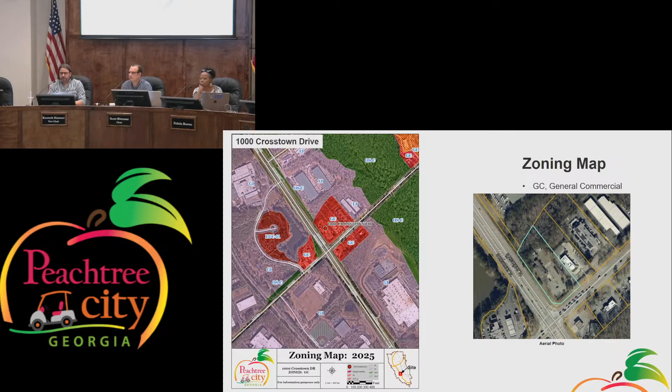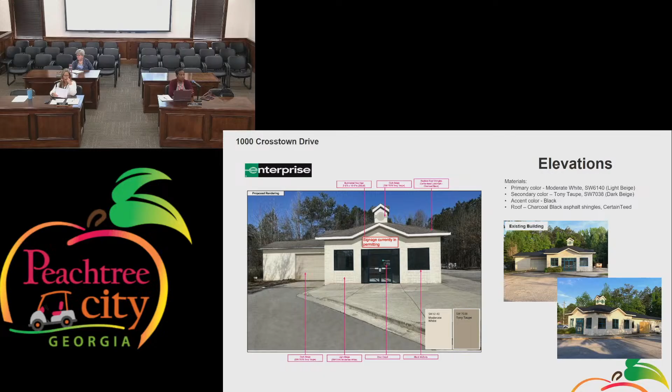Okay, thank you, staff. Is the applicant here this evening? If you'd please step up to the microphone and give your name and who you represent. Billy Giddens, Property Development for Enterprise. Okay, thank you. Do you have anything to add to staff's presentation? No, not really. Just like Laura mentioned, we just tried to make it consistent with the surrounding environment, and we didn't want it to really stand out as much as blend in.

Okay, great, thank you. I'm going to go ahead and open it up for questions from the commissioners. Commissioner Reeves, any questions of staff or the applicant? Yes, thanks. Good evening, thanks for being here. I know we're looking at the building elevations, but I guess I have just curious questions. Based on the location and based on it being Enterprise, do you have any sort of numbers you can give us as far as how many cars you think will actually be on the property?

All right, so that's a trick question a little bit, so I'm going to try to explain it as best I can. The existing location that we already have at Peachtree City, that we will be moving from the old location to this location, they probably operate—I was just checking my notes actually, they send out fleet counts every hour—roughly 330 vehicles. But the trick is obviously with Enterprise, you don't ever see those vehicles sitting on the ground, because if you do, we're not making money, right? So all of those vehicles are on the road. So on average you will probably see 25 vehicles sitting on the ground, maybe 30, but we're projecting this one to possibly even grow as much as 400 cars, to be honest with you.

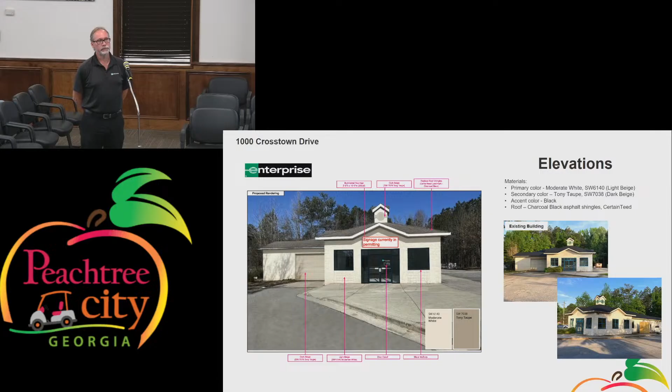To answer your question straight away, we will already have chargers installed here in anticipation of growth, but we'll probably start out with one or two charging stations, and then as we grow, that'll change.

Any comments, Commissioner Hamner? I think the colors are going to look really good. Also glad to see this building put to use. We are looking forward to it - it's going to look really nice as well, much better than it does right now, even with the new roof.

Commissioner Reeves? I agree. I rode by there earlier today, and it seems to be a great location for an operation like that. With the updates you're going to do, they look like they'll be a nice feature.

In my comments - and this is nothing against prior property owners - but unfortunately that has not been a very attractive corner for a little bit of time. So it will be nice seeing everything freshened up. One of the things I'd like to see, especially on that corner, I'm not sure exactly where the property lines go up to 74 and Crosstown, but whatever can be done landscaping-wise just to help that out. Right now it looks like just a bunch of dirt.

And I know that's not part of your actual company or anything like that, but just to do a little beautification on that corner would be really nice if possible. I can tell you this is going to be my baby, so to speak, it's my project. So as we go through the planning, if there are suggestions for landscaping, we will abide, I can promise you that. Okay, definitely would appreciate that.

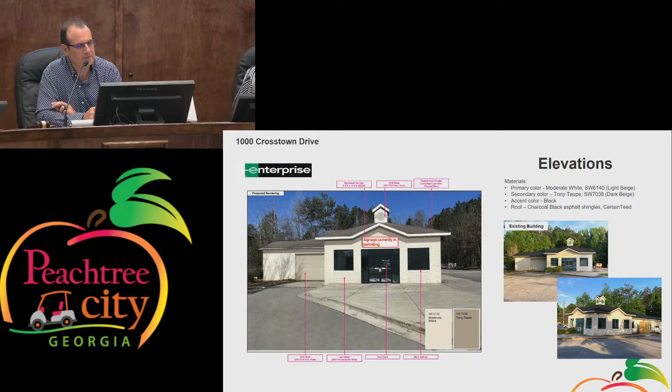Anything else? No? Okay, so do we have a motion? I'll make a motion to approve the building elevations for 1000 Crosstown Drive, Enterprise. We have a motion to approve. Do we have a second? Second. Motion to approve and second. All those in favor signify by saying aye. Aye. It is approved. Thank you very much.

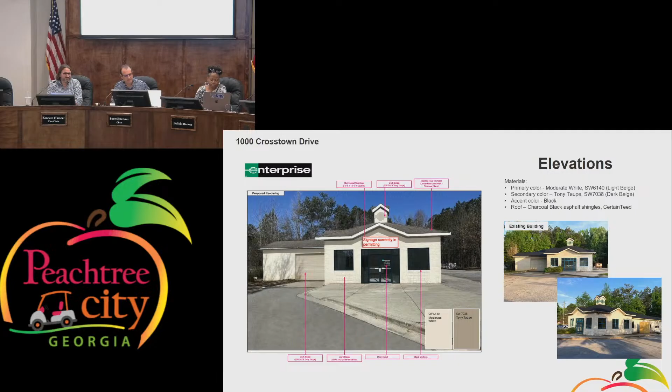Okay, next, the building elevations request for waiver, McElroy Metals, 555 Dividend Drive.

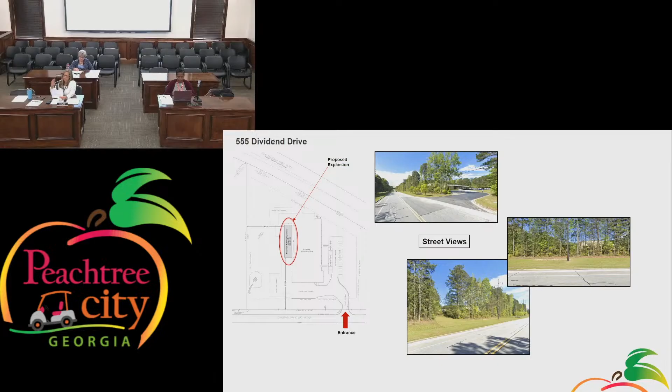So, McElroy Metals is proposing to do a fairly small building expansion. It'll be just under 5,000 square feet. And the land development ordinance gives the planning commission authority to waive an architectural review for a building if it will not be visible from the road once the project is completed.

So what we have here is the site plan showing the proposed location for this 4,000 plus square foot building expansion. It is on the opposite side of the building and towards the rear of the property from the entrance drive. What you have on the right-hand side are a couple of street views as you go down Dividend Drive.

This would be the first one as you're going, I forget which direction, north I believe. And then here's your, you can kind of see into the property at the entrance. And then as you go down, there's a fairly substantial existing buffer located here. So it is staff's opinion that this project will not be visible from the road. Of course, it is your decision to waive the review.

I just also wanted to point out that because this project is less than 5,000 square feet of addition or replacement of impervious cover, it will not go through the site plan process, and therefore you will not see it as part of a conceptual site plan review. Okay, thank you, and that's really all we have on that. So let me know if you have any questions.

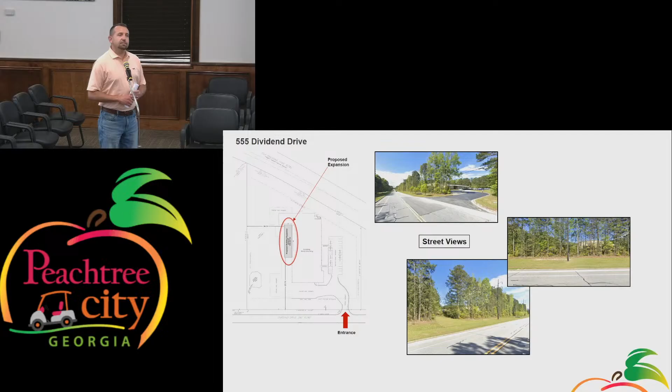Yes. All right, that is it. Commissioner Reeves? Any questions? No questions for the applicant.

I think I have a gee whiz question for staff. When we waive something under section 724, does that specifically mean that all the sections within are waived? Section 25, 26, 27, 28? Yes, all those apply to an architectural review, so yes, it's a blanket waiver for all of them. Okay, thank you. Meaning they won't have to come back before you with proposed building elevations.

I did actually want to add, although you won't be seeing a conceptual site plan review, they will have to submit a site plan with their building permit application, and at that time we'll make sure they have enough parking and all that kind of stuff. Thank you, I'm just going to go ahead and stay with you.

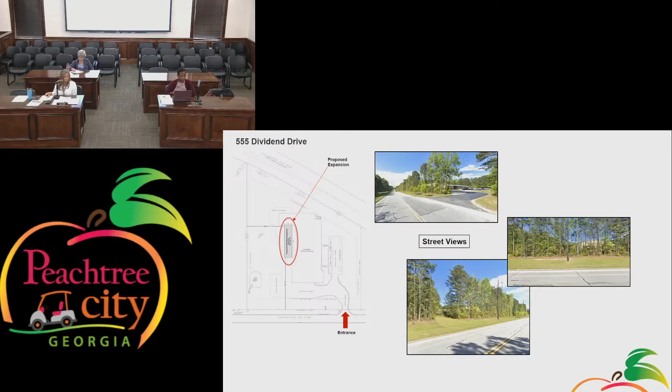Any comments? No comments. Commissioner Hamner, any comments? I think this is very much in the best interest of Peachtree City and obviously for the company itself. Yeah, this looks good. Since it is pretty much hidden by the buffer and not really a direct view from Dividend, I don't think there's any issue with going ahead and waiving.

So I guess with that, do we have a motion? Motion to approve the building elevations request for waiver at McElroy Metals, 555 Dividend Drive, as submitted. Okay, we have a second? Second. Okay, we have a motion to approve the building elevation request for waiver, McElroy Metals, 555 Dividend Drive, and a second. All those in favor signify by saying aye. Aye. Aye. Okay, the building elevation request for waiver is approved. Thank you. Thank you.

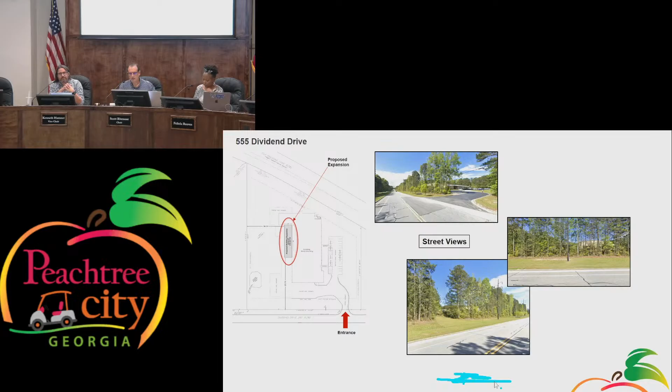I apologize, I'm drawing on the screen. Looks good. Thank you. Yeah.

Okay, next item is the building elevation modifications, office building, 455 Northlake Drive. Just a reminder, you've seen this site a few times, and it is located at the intersection of Aberdeen Parkway and Northlake Drive, across from the Partners, Aberdeen Plaza, where Partners is located, right here, and it's zoned GC General Commercial.

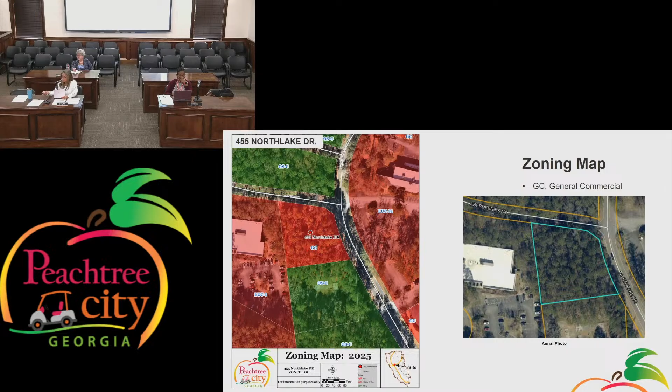The elevations for this project were approved in March, so that's probably why it looks familiar to you. They have refined their architectural design a bit and are coming back with a modified proposal. It still uses the same brick colors, so there's no change of colors proposed. It's more of a color placement change, and they've also tweaked the design based on some comments you all had at their first review.

Here we have some aerial shots that will be a little easier to understand, but I wanted to start here. These are side-by-side comparisons. I know this is awkward because the building is sort of an odd shape, but these were the original approvals, and this is the new proposal.

These show you which side you're looking at. So this east elevation, which is this group, is basically what is seen from the corner, although there is a bit of a buffer here, and so forth: north, south, west.

The change is that they've used the colors in a way to accent the building, versus before they might have been a little less focused. So the brown brick is now proposed at the base of the building, all around, and also to accent the entrance. Then the remainder of the upper section, aside from where the entrance is, will be the white brick.

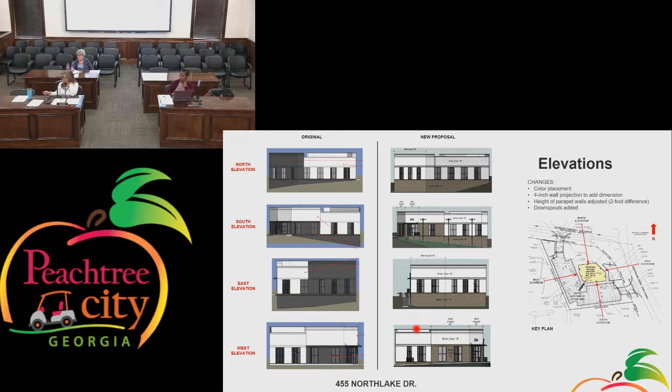Back to the 4-inch wall projection, you can see it here. This is the view that was in your packet. But if you look at it overhead, it's a little easier to see how this section of the building projects the 4 inches. You can kind of see it at the corners, and also on the front view right here, you can see a little shadow there. So I hope that is evident to you.

Let's see. So I think that's about it. Staff is of the opinion the modified building elevations for the office building meet the city's development standards.

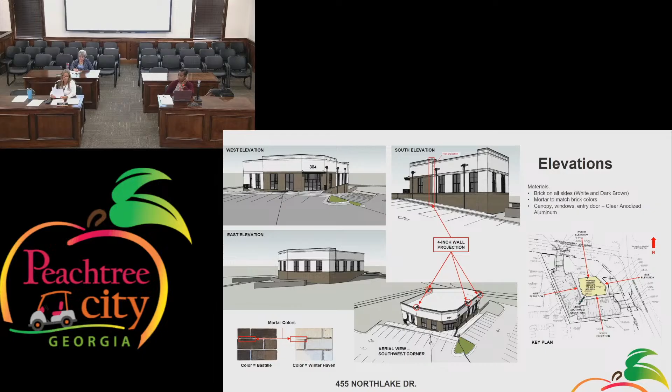Okay, thank you. Is the applicant here this evening? Yes. Please step up to the microphone and give your name. I'm Doug Carruthers, the architect. Okay, thank you, Mr. Carruthers.

Anything to add to staff's presentation? No, I think Laura covered it all. The only thing I would add is that the 3 downspouts have now been changed to where there's only actually one. I can show it on a previous elevation—is it easier to see on the elevation? There you go. That's the west elevation, this is south, the east elevation—2 windows there on that angled wall, it's kind of hard to see. It will just go right down between the 2 windows right there.

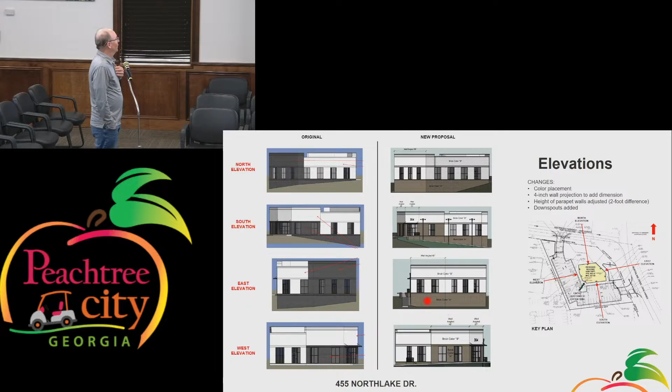So these are not proposed any longer, is what you're saying? Yes. Okay. So on the south elevation, in between those 2 windows there, there will be 1 downspout. So instead of the 3, there'll only be 1. Okay.

I can send you the revision, but in working out the roof slopes, it ended up being better for us to do it all in one location. It'll be this one right here, but those 3 there will get moved to the right side of that 3D view, the 2 windows.

Yeah, you're saying right, coming there, down right in between there. So it makes it a little simpler, I think, than having the 3.

The parapets were lowered, but the rooftop units were fully screened. Okay, very good. Thanks for clarifying that.

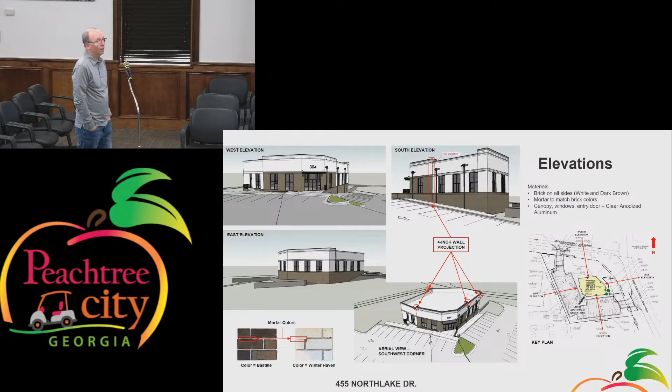Sorry, just to make sure I understand. I've made a little green mark right there. Is that where it's supposed to be? It's like right around there? Yes, facing the road. Got it. Okay, thank you.

Any questions, Commissioner Reeves? No questions. Commissioner Hamner? No questions. I don't have any either.

Any comments overall? Hamner: looks good. Commissioner Reeves: same. I just wanted to say we really appreciate you taking another look at that, providing a bit more delineation, as staff mentioned, between the different sections of the building. I think it's better now. It sets off the front entrance a lot better than it did, and I do like the flip in the brown and the white to what it is now. So definitely appreciate you taking a look at it again.

Thank you. Okay, so do we have a motion? Yes, I'll make a motion to approve the conceptual plan for Kensington Gardens... Let me see, nope, you're good... North Lake... I'm sorry, I got off track. For building elevation modifications, office building 455 Northlake Drive.

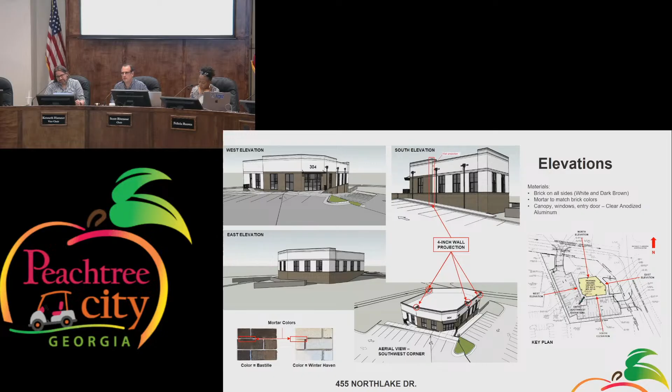Okay, next we have the conceptual site plan and elevations, office building 3511 TDK Boulevard.

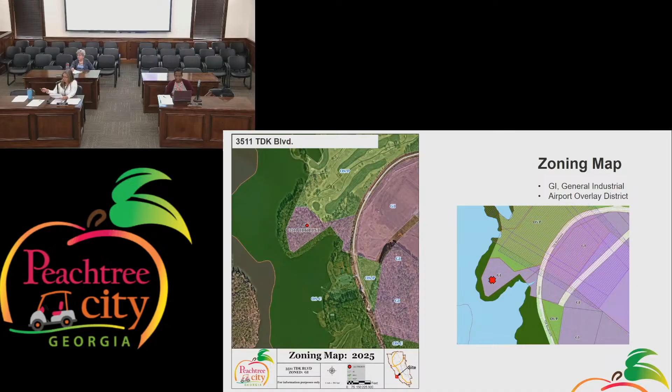So I have 2 different versions of the site plan in case you are thinking, boy, I'd like to see that better. We're going to have a little bit of a close-up there, but we'll start here so you can see the full site.

The building being proposed is a 2-story building, a total of 13,600 square feet, and there are 54 parking spaces provided.

There is also, let's see... of the parking spaces provided, 7 of them are impervious paving, right here near the front door where the handicap accessible spaces are, and then the rest are pervious paving, 47 of them.

They are also identifying tree save areas in this section, and then all of this—just want to point that out—will aid in their calculation of requirements for landscaping in the future when we get to that point.

The lot is currently vacant and wooded, as you saw in that aerial photograph. The lot is 5.17 acres. The setbacks are 50 feet in the front, which you'll notice gives them very limited frontage right here, just enough to get the access drive in—50 feet in the front, 20 feet on the sides, and 50 feet in the rear.

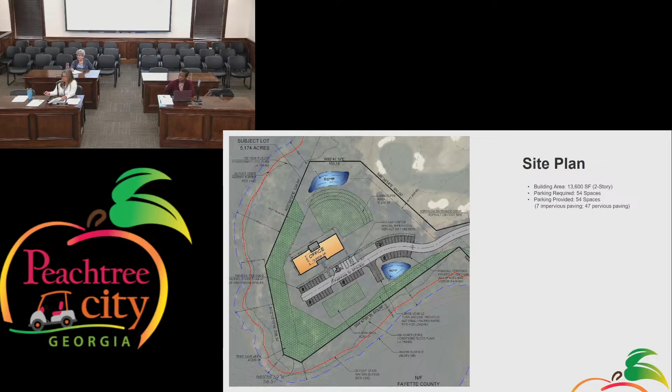I'm going to move into the architectural design. So the proposed building, we have some elevations and we also have some renderings to show you.

So the proposed building has a real modern look and feel. It has lots of glass. You can see...

The materials proposed here on the side. There's some natural stone, some Tennessee field stone there, and also the Nichiha fiber cement products are proposed as their primary materials.

In case you're not as familiar, I'm sure everybody's familiar with Hardie board, HardiePlank siding, but the Nichiha company manufactures these products as architectural wall panels that can mimic the look of materials like wood, brick, concrete, and steel. So it's quite versatile and allows for a lot of different looks using that material.

And we do consider, as we have in the past, the fiber cement board as meeting the intent of the land development ordinance for durable, long-lasting, and low-maintenance materials such as brick and stone.

The building will not really be visible from TDK, as you can see, due to the long driveway in. And I'll give you a little bit of a view here of the renderings.

This is an approach view of the building, and this is probably about halfway up the drive. So from the very beginning, it's if you can even see it, it'll be a dot in the distance.

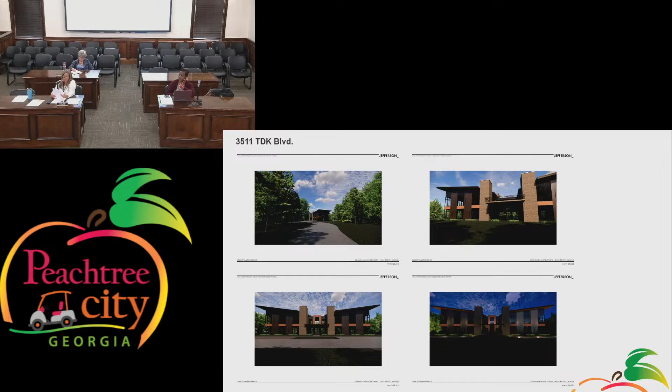As you know, the land development ordinance establishes color requirements. The predominant colors should be neutral or earth tones. And then, of course, you saw the palette - the stone has some grays and browns. There's the cedar finish browns for a vintage wood look, and the other fiber cement panels of a dark gray color, and the metals are an iron ore color. So all earth tones there.

Staff feels the color selection will blend well with the natural surroundings. I think that is all I have for you.

Staff is of the opinion the conceptual site plan meets the city's ordinances and development standards. The proposed building elevations are innovative, neutral, and blend with the natural surroundings, which meets the majority of the city's development standards. However, the percentages of primary materials falls a bit short. Therefore, approval is up to you. That's all I have.

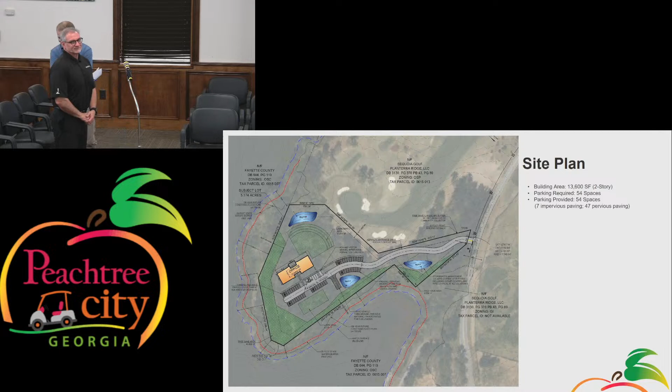Is the applicant here this evening? Please step up. Jason Walls with Highland Land Planning here to speak about the site plan. If you guys have any questions on that, that's a pretty thorough explanation, so we'll just hang tight and answer your questions. Jefferson Brown, architect and hopeful owner.

I'm going to go ahead and open it up to questions of the applicant, site planner, or staff. Commissioner Hamner? Yes, sorry, just to revisit the percentage of the primary materials, again, pretty dense, that was a lot for it. Just to recap very quickly, where does it fall short, just to reiterate that.

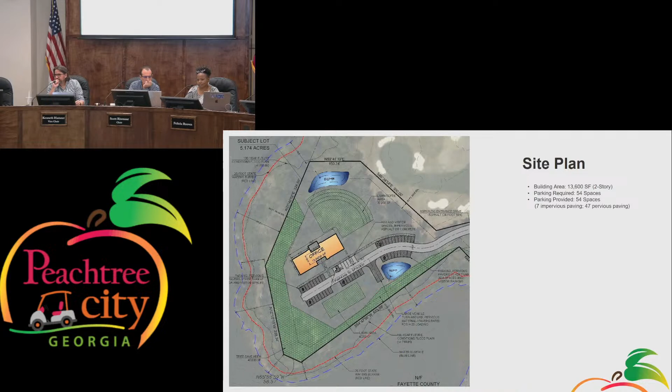Excuse me. So what we're considering the front of the building is this little end piece that faces the road. And it is mostly glass, and it has a good bit of metal panels and just a small amount, only 13% of fiber cement.

And just to recap, because there were some numbers thrown around, is there a minimum that it needs to be? According to the ordinance, it should be 80% primary materials. Okay.

For the applicant, yes, okay, I can answer that. What are your thoughts on that? Yeah, I can answer that. Thank you. We didn't ignore the ordinance. We thought possibly that since you can't see this building from the road, that it was an opportunity that we could possibly get that exemption. But it was more about the architecture, balancing the architecture, balancing the materials.

This is a site that we were looking at as a conservation development. We're saving the trees, we're saving the wildlife, we're proposing putting in planters, we're putting in feeders for the wildlife. There are deer, there are ducks there, there's things that we want to do. We're trying to create an environment where the creative people that do work on staff, if we're looking outside the window, we actually want to feel like we're in the canopy of the trees. We want to see the trees, we want to see it moving.

Even we have eagles out on the property, and if you can imagine that front, we call it the rear elevation and the front elevation, imagine an eagle when they take off - they drop and they throw their wings up, and that is where the inspiration comes for that design.

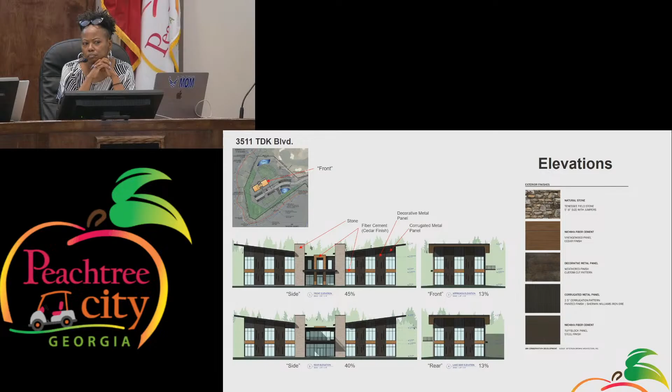Okay, going to go ahead and stay with you for any comments. Once again, the conceptual site plans you bring in front of us are always beautiful. The building is beautiful, and I definitely understand the conservation aspect of it, and the concept of being in touch with nature as you sit and do your work. The only concern I have is the tremendous delta in meeting what the land ordinance says. For me, I think that based on the fact that no one is actually going to see the building, although this is the front and side you've indicated, to me your sides are the front and the back, and no one is actually going to see it from anywhere. So based on that, I think I like it.

Great. Commissioner Hamner? I really like this building. Looks great from a design perspective. I think it's just cool. It's great, and I really like the nature stuff you're talking about as well.

It's that 80% though, and obviously we have that as a rule, and we've enforced it with others as well on that. I agree with Commissioner Reeves that the sides are really the front and back on this, and I would view that as in the spirit of how you were intending the building to be, with the 45% right now being the front. But again, it's that 80%, and I don't think I'm comfortable having a building elevation and a waiver conversation at the same time. I see those as potentially separate conversations. But again, the building's great, but that 80%'s there.

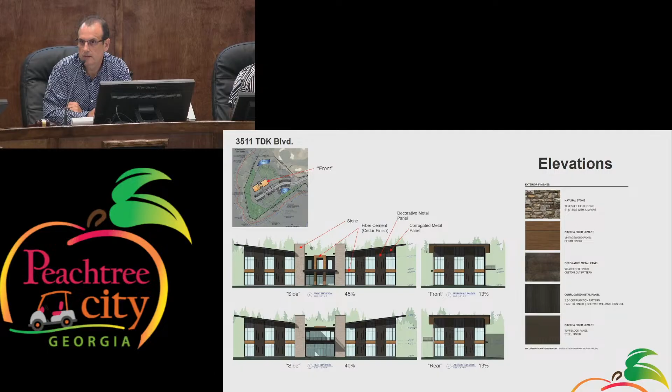So let's put it this way then. What other options would we have as the Planning Commission to, I wouldn't say grant because it's not the right word, but to give an allowance to deviate from that 80% because the building is not visible, or are we able to do that? Any restrictions that are lessening or changing with the code requirements, that's only at council's hands for a variance. So I don't believe you can lessen it at that point at your level of power. Okay, and that's what I was wondering, so thank you.

Let me go back to the building itself. Jefferson, simply beautiful. This piece of property is very difficult, to say the least. I know we have seen a condo type complex proposed for this, and it's on record that we as the Planning Commission did not like that. We really hoped this would go in and stay zoned for commercial as it was originally zoned and not switch over to residential, and there were other issues related to that too. It has sat for a while because it's very difficult access-wise, and the requirements placed upon it. So for you to be able to go in and do something like this is outstanding.

The first thing that I saw when I looked at the building, I looked at either aviation or avian, exactly what you designed it for. And I figured that was the case, and I wasn't going to ask if you designed it for that reason. Yes. I love all the glass. Unfortunately, it does open up the issue with that 80% on that side.

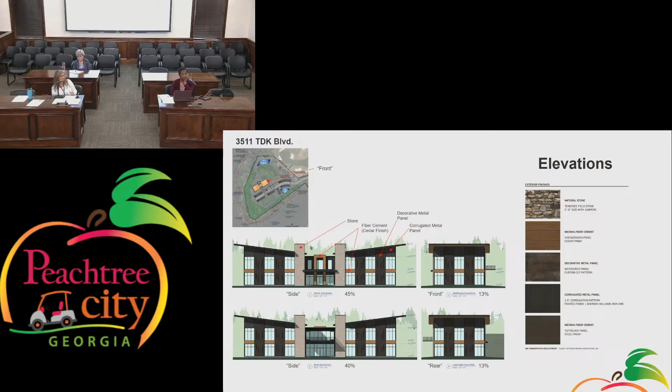Well, they could come back to the next meeting, which is the 23rd, and ask for a waiver. What do you think? I think that'll change the material to get it to the 80%. Okay, and then get the approval.

There's a lot of people waiting on answers to whether this project's moving ahead or not. I feel like I need to be responsible, agree to that, and then let other people know.

Got it. Okay, and just a question, if we move to the panel for the front, what about the rear? There's no requirement in the rear. I mean, he may want them to match for design symmetry, but that's a design decision. Would you go, or would you leave the rear, the lakeside elevation, open? I would think probably leave it open.

I'm gonna leave it open, but meet the requirement. I'm all for symmetry in certain things, but it's asking the architect, and I figured that would be your reply.

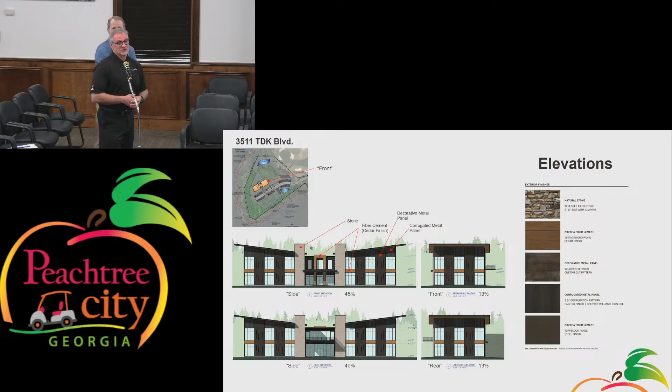What our goal is, that space there is where we bring clients in and do charrettes - we spend 2 days with them. They fly in, we get on the boards, and we have a lot of fun opening up doors, opening up to nature, those type of things. But it's also a place where we'll serve our veterans program, and Aloe Farms, our farm projects and programs. So it becomes a meeting room, but it's a charrette room for us.

Okay, so it's important that we can open up that wall. I understand, yeah. Okay, okay, good. All right, yep, yep, okay.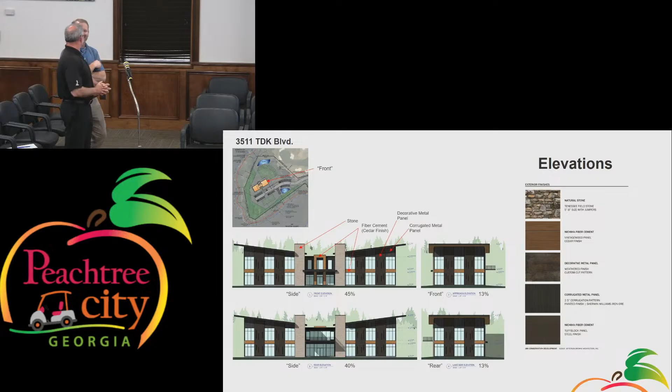Well, Commissioner Hamner, you're looking at me, I'm looking at you, so would you like to go ahead and make a motion on this? Motion to approve the conceptual site plan and elevations for the office building at 3511 TDK Boulevard with the condition of doing the panel on the front to meet the 80% requirement.

Okay, and let's make sure that the front is the approach elevation as submitted. Yes, okay. Second. Okay, so we have a motion to approve with the condition to make the front or approach elevation up to 80% of the nichiha material as proposed by the architect. Any other comments or questions?

No? The building is beautiful. Thank you, really is, I really like it. It's very pretty, and it's actually unfortunate no one will get to see it where it's actually located. Well, hopefully we will, once you're on the site. I actually looked at this as the nature version of SMC3 in some ways, so a lot of the same language.

Okay, so we have a motion to approve with conditions and a second. All those in favor signify by saying aye. Aye. Okay, approved with conditions. Thank you, all right, thank you.

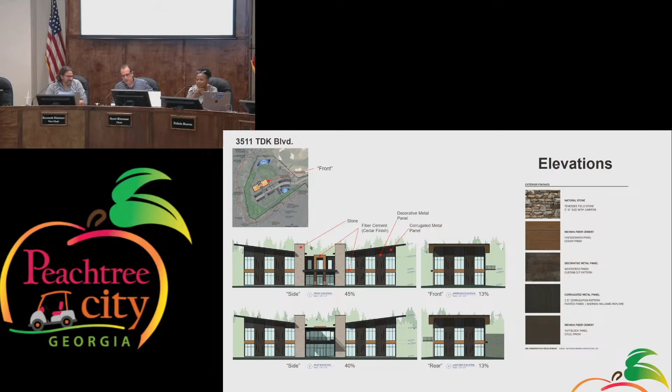Okay, we have one last new agenda item, that's the conceptual plat for Kensington Gardens, 400 Stagecoach Road / Spear Road. And turn it back over to staff.

All right, this property was annexed into the city in December of 2023 and was rezoned to two different categories. You'll see on the plan that this site is divided by streams - this section was rezoned to ER, Estate Residential, and the remaining section a limited use residential district, LUR 23. This LUR 23 is the portion we are concerned with this evening, where the development is proposed. This is the new middle school at the end of Stagecoach Road, and then this is Spear Road.

So here's the proposed plat. The LUR zoning was approved with several conditions, which I'll try to list quickly.

All residential lots shall comply with all requirements listed in the zoning ordinance for the R43 zoning district. Those being minimum lot width 150 feet, minimum lot width adjacent to a street right-of-way 40 feet on the street, 35 feet on the cul-de-sac, front setback 50 feet, side setback 15 feet, rear setback 30 feet.

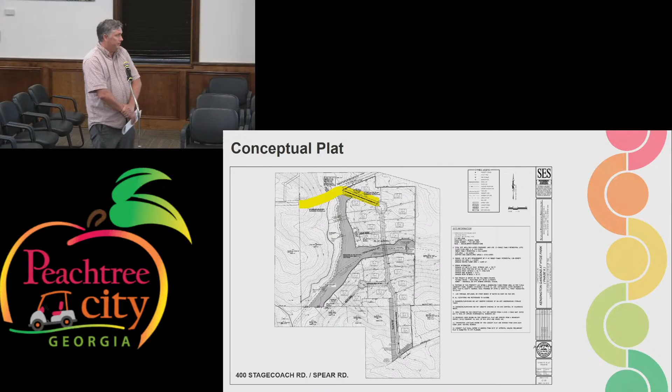Thank you. Any other questions? No? Okay, any comments for staff or the applicant? No comments. Commissioner Hamner? Meets all the requirements.

Yeah, that's all I got. Yeah, I remember looking at this back in 2023, with Camp Creek running through there, and what was proposed to go ahead and take care of it. I agree, it's meeting the requirements.

I guess what Commissioner Hamner was mentioning about the recreation area would be nice, and I know there's going to be that extra 9 acres that could be used for recreation. But depending on what you do on those 3 acres up there, it's a bit of a hike from those lower lots along the main street, going up on Stagecoach and then up into there. I think we always try to keep as much recreation in the area of the homes as possible. So it will be a big thing to go ahead and use that recreation, that 9 acres, to cover those areas down, that's going to be in Phase 2 as well as Phase 3.

It's an amenity that we want future homeowners to have as well. Absolutely. Okay, any other comments, questions?